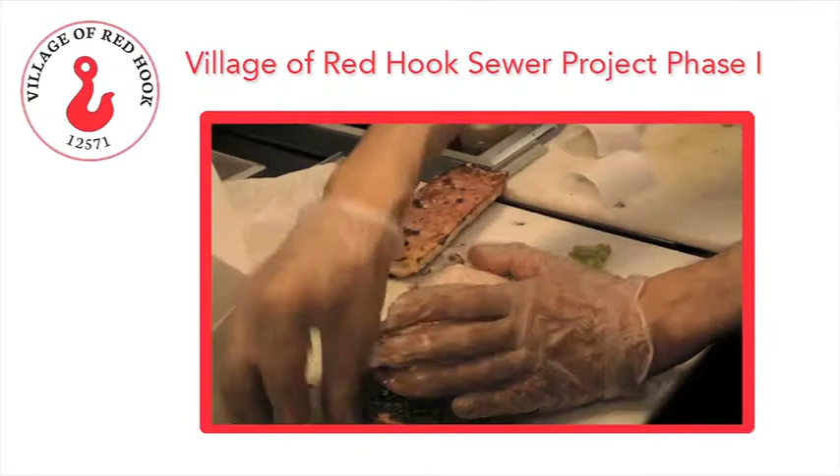The village of Red Hook is thriving. With this success have come new demands on municipal services. Red Hook requires a sustainable infrastructure, such as a modern sewer system. Waste management has been discussed in Red Hook since 1947. The time has come to provide the citizens this vital service.

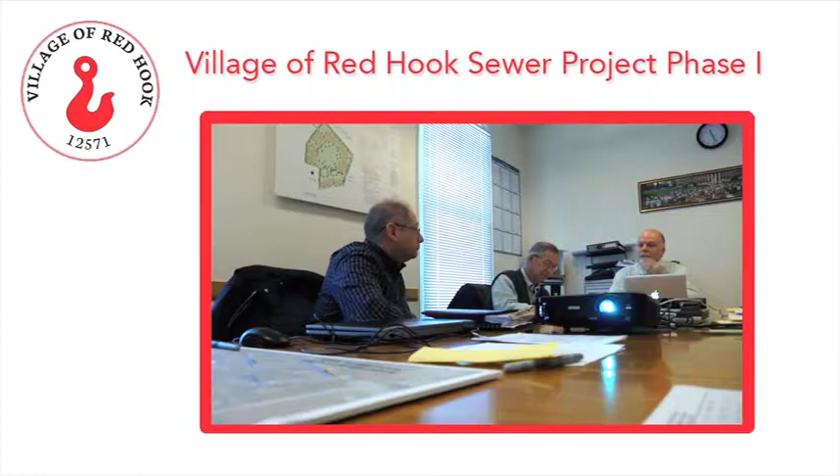The village of Red Hook has recently completed a comprehensive plan for a viable sewer system. Historically, here in the village of Red Hook, there's been a 70-year, believe it or not, inclination to have a central sewer. The downside is it's not been built. Here in the year 2017, we're on a path to actually getting it built.

Some of the developments in and around the village have included some very progressive town zoning plan changes, where they've created a centers and green space project. It's a forward-thinking zoning outlook where the village becomes the business, economic, and cultural hub of the town of Red Hook, which is what we want here in the village. That's our perspective. We want people to be able to live and walk in the village and have fun restaurants, viable businesses, interesting community centers, different things.

As one densifies the center, one further realizes the need for a central sewer. Ironically, in our village, our comprehensive plan is somewhat decades old, so what we'll have to do as the sewer comes in, we will then also look at our comprehensive plan. We'll have to do some zoning changes because we'll be able to attract some more businesses and larger restaurants, things that'll be more economically viable, and we want to make sure businesses can come in and out without a lot of red tape to take advantage of the central sewer.

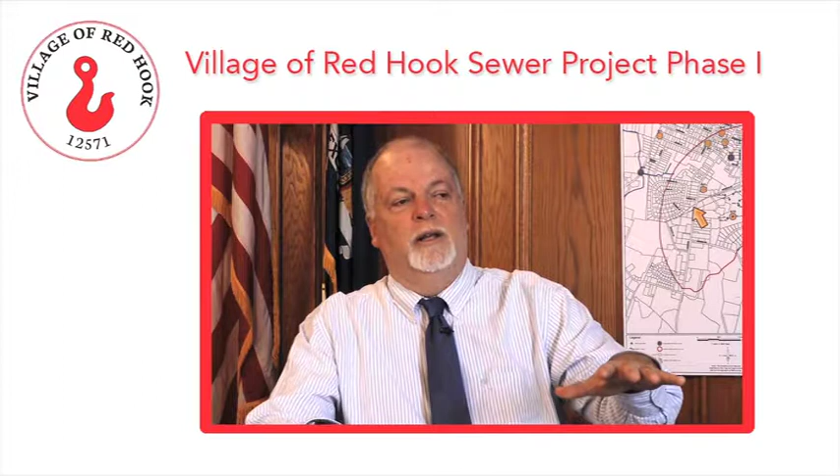We're not saying open zoning and open change. We're saying we want to attract what we want here, what we envision, what our dream is for the village. Once we get the sewer in, concurrently we'll be working on another project, a zoning project. We're actually looking at some Dutchess County money for innovation grant studies where we might be able to fund some planners and things like that to help us work around the sewer project to redevelop our zoning.

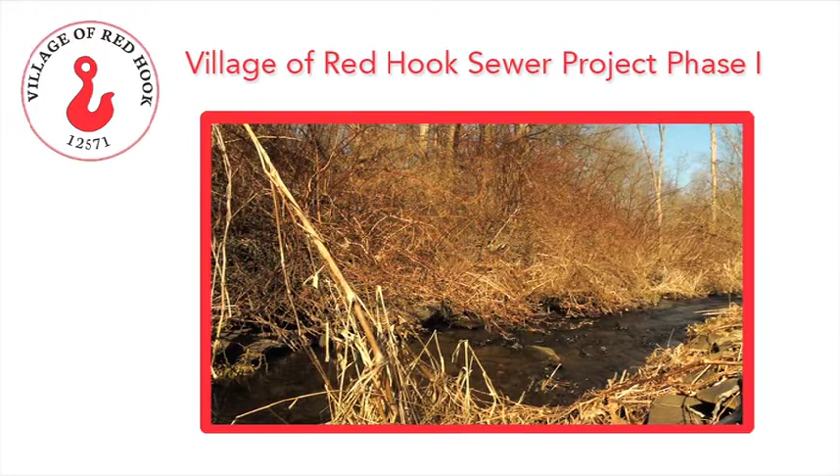It is essential to protect Red Hook's aquifer and to have clean, safe drinking water. So the aquifer here in Red Hook is where we get our groundwater, which provides the drinking water. The way it's made up is basically there's a shelf of rock and about 20 feet of sand on top of it. That 20 feet of sand is the shallow groundwater where we get our water supply. So the way the aquifer works, rain and runoff recharge the aquifer.

Any septic systems in the village discharge their wastewater into that same aquifer. That travels through the shallow gravel and sand to the wells that then pump and provide the water to the village. So the concern is: if the waste is going into the ground and traveling with the groundwater to the drinking supply wells, how do we know it's safe for us to drink? The short answer is we sample it, check for bacteria, and make sure it's safe.

As of right now, all the samples we've taken show the water supply wells to be 100% safe, no bacteria. What happens is the bacteria that we can detect and measure in the village dissipates as it travels toward the water supply wells. So the natural filtration right now is enough to make it potable water without any additional treatment. So what's happening is the existing septic systems in Red Hook are substandard and very close together. What's supposed to happen is there's supposed to be treatment before it gets discharged to the groundwater.

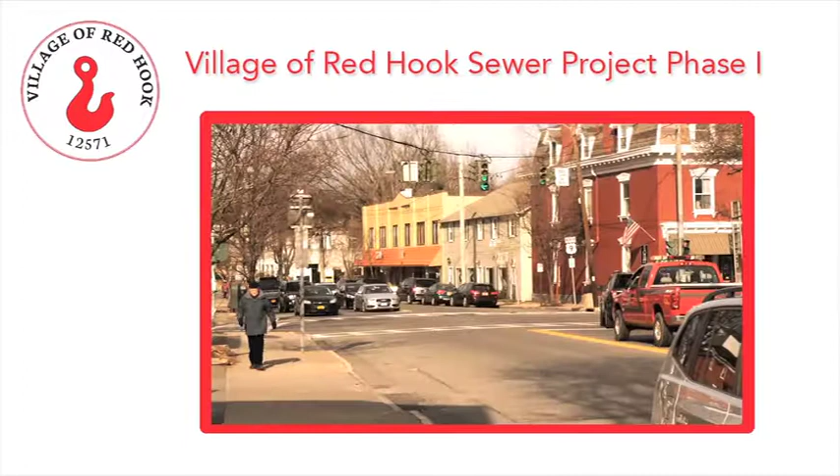To maintain a healthy and prosperous village, new businesses must be welcomed and existing businesses must be allowed to expand. This will create more jobs and a more stable local economy. This growth must also be carefully managed in order to enhance the beauty and walkability of the village for residents and tourists alike.

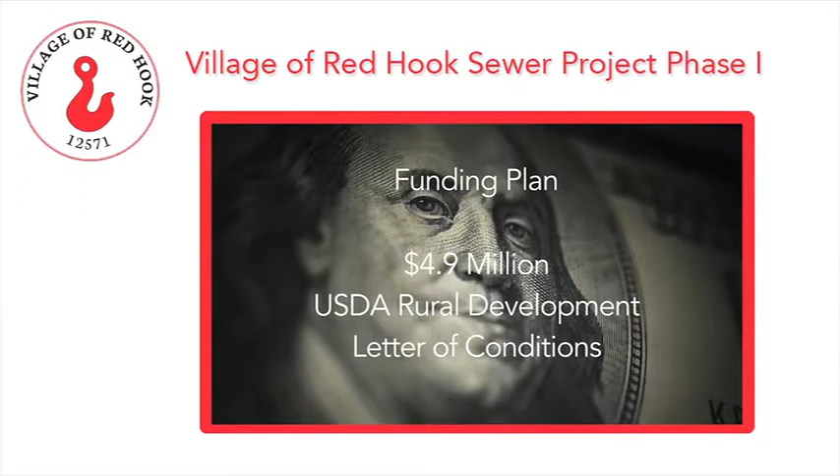The funding plan for this phase of the sewer project is realistic and workable. It will cost $4.9 million. These funds will come from multiple sources. Red Hook has received a U.S. Department of Agriculture Rural Development Letter of Conditions. This means that funds have been earmarked for the sewer project if the village chooses to accept them. This commits $3.7 million in a low-interest loan for 38 years. Additionally, a grant of $1.2 million will be provided. The village is not required to pay back the grant.

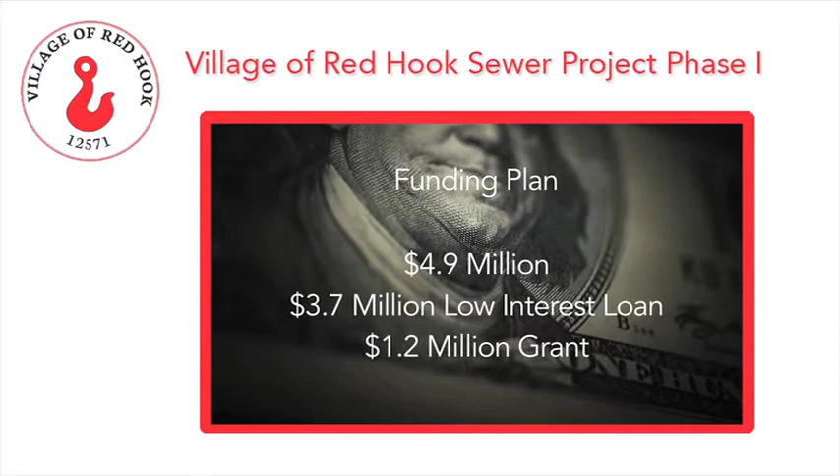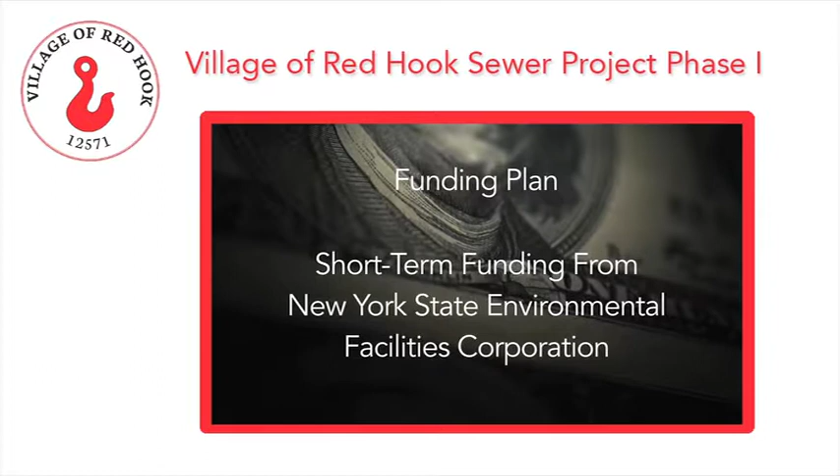To begin construction of the sewer project, the village will receive short-term funding from the New York State Environmental Facilities Corporation, which will be paid back when the Department of Agriculture funds are received.

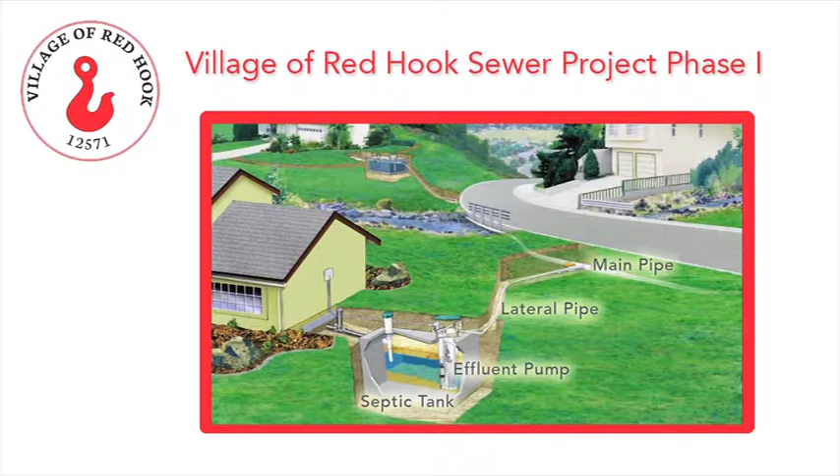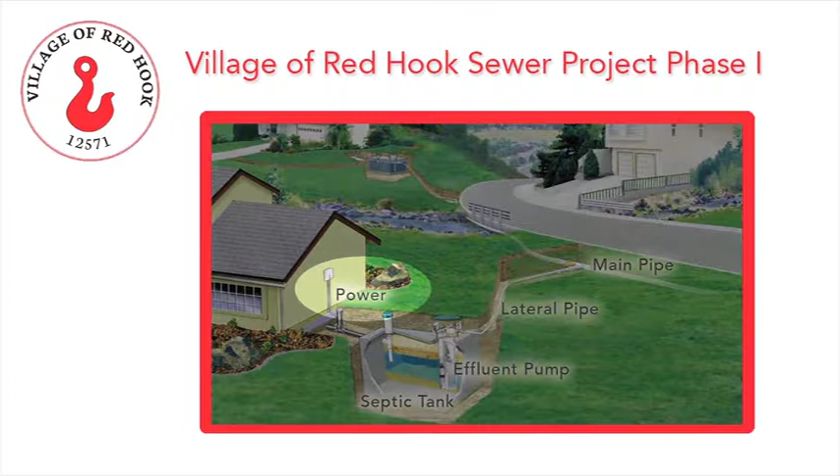The design of the sewer system is simple and realistic. The new facilities are called a Septic Tank Effluent Pump System, or STEP system. The village will install on your property a new, code-compliant septic tank, effluent pump, lateral pipe, and main pipes on the street. The village will remove your old tank and will own the newly installed tanks. You don't have to pay for them or their installation. Grease traps will be installed for restaurants and pumped by the village. All property owners will provide an easement for maintenance from the tank to the main sewer lines on the street. All power necessary for the tank pumps will be supplied by the property owner. In case of a power outage, backup power will be provided.

It's simple in its installation, and that is something that we were concerned about. In a traditional gravity system, which involves trenching, opening up the streets, usually on main streets, and in our case on state highways, this system will instead be installed with directional drilling. It doesn't rely on gravity because it's pressurized. A directional driller is a machine that would actually bore into the ground and drill horizontally. We can go under buildings, under trees, avoid any utilities, which are very few in the village, mostly water. And it minimizes disturbances in the site.

Also, we can keep the businesses up and running during construction because the mains, in most cases, will be installed in the back of the properties. This is where the septic tanks are currently located. So again, it's simple for installation, minimal disturbance of what you have other than installing the tank. There will be a lateral with a small trench dug to the main itself, but you'll see very minimal disturbance in the village when this is under construction.

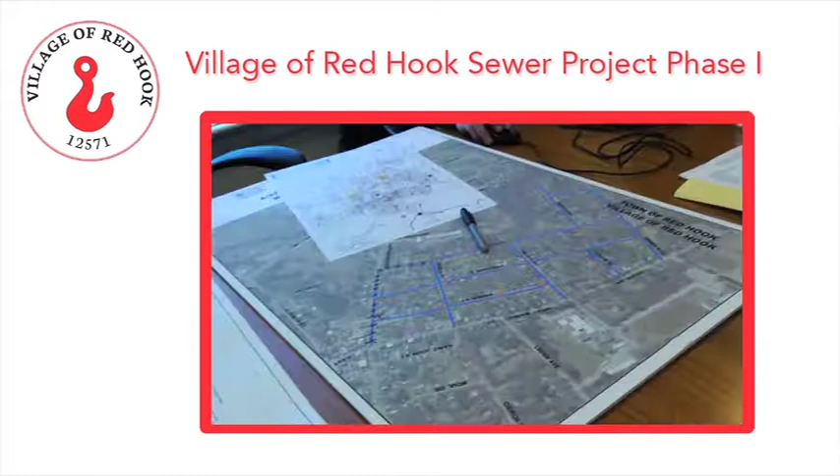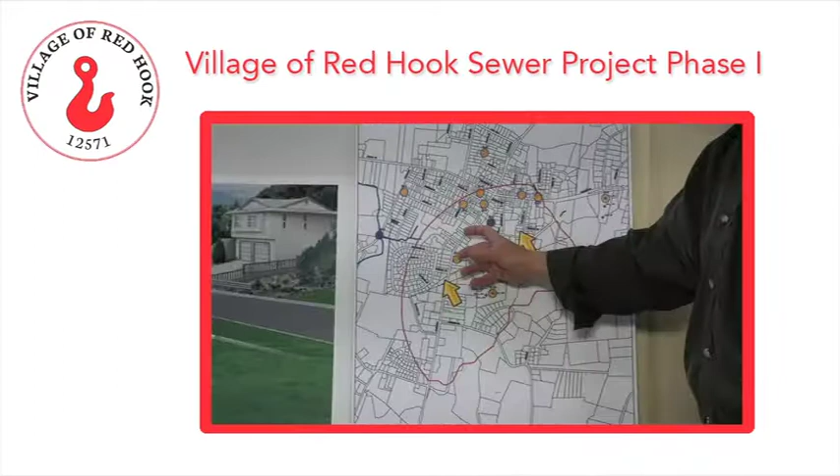There are many things that need to be accomplished to make this sewer system a reality. The village needs to develop and incorporate a sewer use law and regulation into the village code. Rates need to be set and finalized, and the village must transact a land purchase from Red Hook Commons for the pumping facilities.